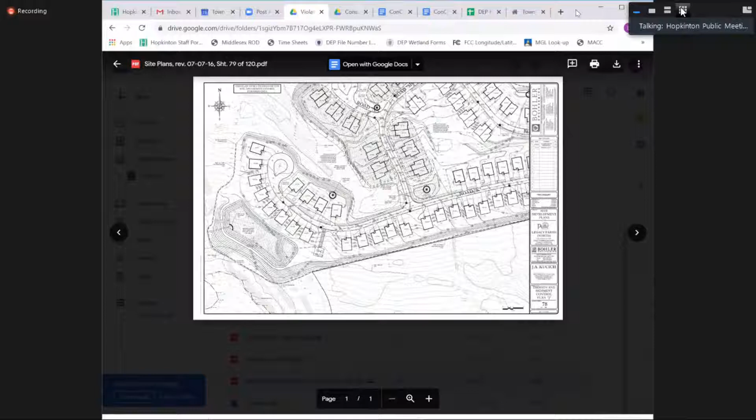So just cracking open - because after I saw this, I was out there on Sunday, I think it was Sunday morning or Monday morning. And it's just my observation that a lot of the erosion controls, the majority of them look like they're in pretty good shape. But there are areas where obviously they've been either damaged or knocked down by the construction activities, so they're not functioning properly. So I think Pulte needs to take a look at that, obviously.

This was the area of my pictures where I saw the breach, and then there was some areas along here - can you guys see the plan? Yep. And then there was some areas along here that the erosion control was in bad shape, but I didn't see any breaching in this area. But this was the area of the breach. This is the edge of the buffer zone right here, so the detention basin is outside. But they need to be obviously addressing the stabilization issue down in here.

So I didn't know if you guys wanted to have them come in at the next meeting. I know it's probably going to be pretty full, but we could put them on maybe at the end of the night and give you more sense of it, because they're working on it now with Beta, trying to make improvements out here so they're not going to run into this again. As far as I know, it was a one-time incident. Yeah.

Why don't we put them on the agenda for the June 9th meeting? And in the interim, if you can just follow up with them, Don, have Matt follow up with them and make sure things are moving along in a timely fashion. We don't want this to drag out for two weeks, obviously.

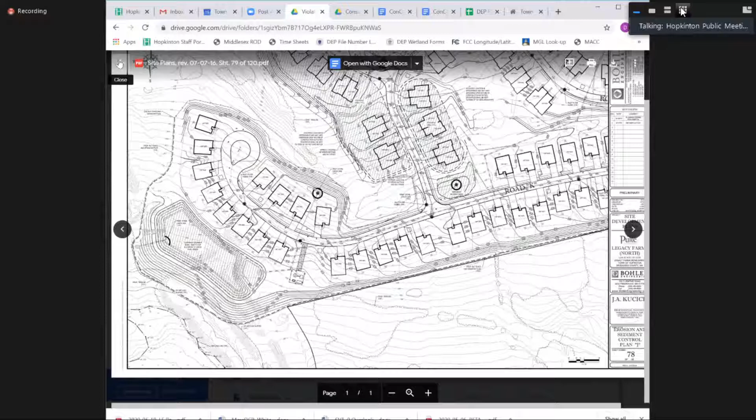Okay, so why don't we open it up to the Frankland Road Solar. This is a continuation of a notice of intent for the solar facility on 0 Frankland Road. I think I saw Mr. Rodriguez is in the audience.

Yep, I'm here. Good to see you again. Do you have someone else with you, or are you solo tonight? No, I have Nick Facendola from Level Design and Dan Wells from Goddard Consulting as well. Okay, all right, good to see you guys again. Good to see you. So why don't you just kind of give us an update as to where you are, briefly, it's been a little while since we've seen you. And then we can take it from there, okay?

Yeah, of course. Mr. Rodriguez, thank you. So Pedro Rodriguez from Seaboard Solar. Just to give a quick update on where we stand in the project - it's been a little while since last we met with the Conservation Commission. From the interconnection standpoint, since that last time we met, we received our impact study from Eversource. Everything came back positive the way we expected, and we expect to receive an interconnection service agreement within two months.

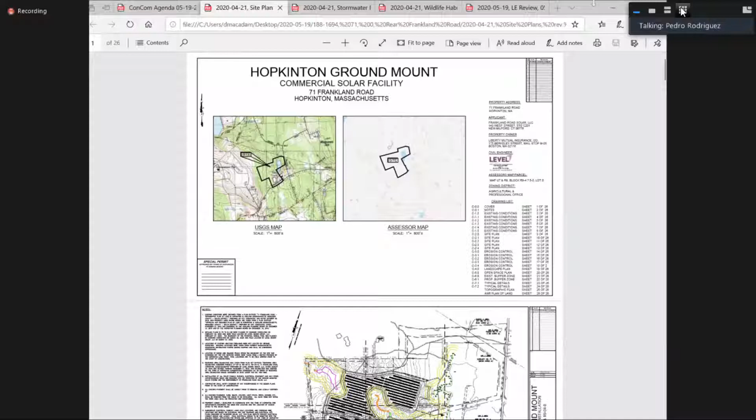Regarding the open space, as I mentioned before, it's our intention to donate the leftover land in the project parcel for preservation purposes and create an open space and inclusive trail. We proposed to the planning board last night to include that as a condition in our special permit, so we are required to donate the leftover land before the project achieves interconnection. Having the land donation as a condition of the special permit provides a guarantee to the town and neighbors that the open space will be in place, and it also gives an enforcement mechanism to the planning board. That's the quick update I have, and now I'm going to turn it to Nick, who's going to be speaking about the engineering changes.

Yeah, so just real quick, Mr. Rodriguez, how much land was set aside under the open space plan? 35 acres or? So we have about 45 acres in the parcel in Hopkinton, where the project is located, and then we have about 1.8 acres in the Ashland parcel. Okay, great, thank you. No problem.

All right, can you guys see this plan? No. Okay, it says I'm sharing, I paused mine, or I'll stop it. Yeah, there we go, there we go. Okay, yeah, so I'll try not to go over anything Pedro just went over.

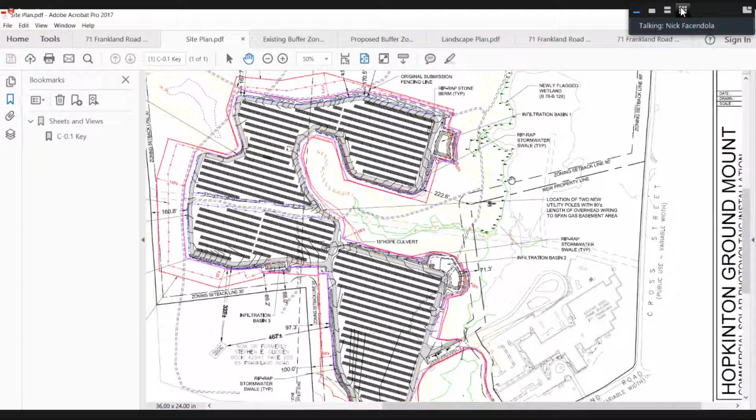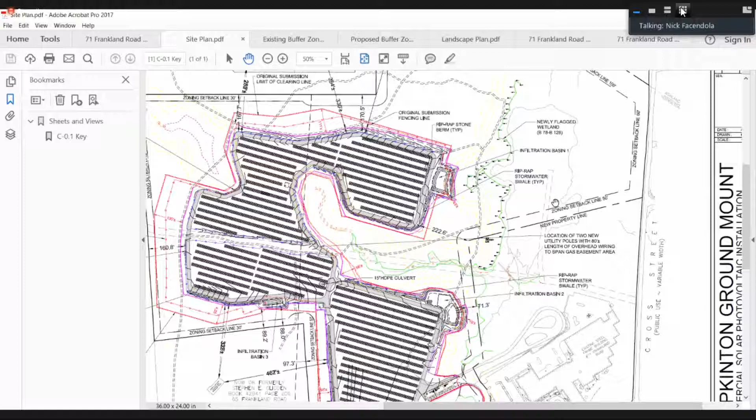Just a quick update on some wetlands items. We did delineate the BVW located around the existing pond as requested at our last Conservation Commission meeting. Dan Wells from Goddard Consulting did that delineation. We submitted that for review, and I don't believe there were any comments on it. We also have Dan with us tonight, who will speak after me regarding this new delineation and the wetland habitat study he prepared on our behalf.

In addition to the BVW that was delineated, we also identified a potential vernal pool in this area right here. I'll let Dan go into the specifics on the characteristics of the potential vernal pool and his findings regarding that area. But we are identifying this on the plan and have shown the associated buffer zone that goes along with that vernal pool.

On this plan, you can see this red line that goes around the edge of the property and down through here. This was our originally submitted limit of clearing, limit of work line. We've brought the limit of work for the solar array in significantly along this end of the property, this end up here, and along this property line against the vernal pool no-disturb zone. So the previously submitted site plan had a site disturbance of about 28 acres.

We're now down to about 23 acres, and system capacity, we've lost about 1 megawatt with these reductions. So we were at a 5 megawatt system, and we're currently at about a 4 megawatt system. These have been some voluntary reductions on Seaboard's behalf to preserve the existing trail network, which is shown on this plan in these dashed lines.

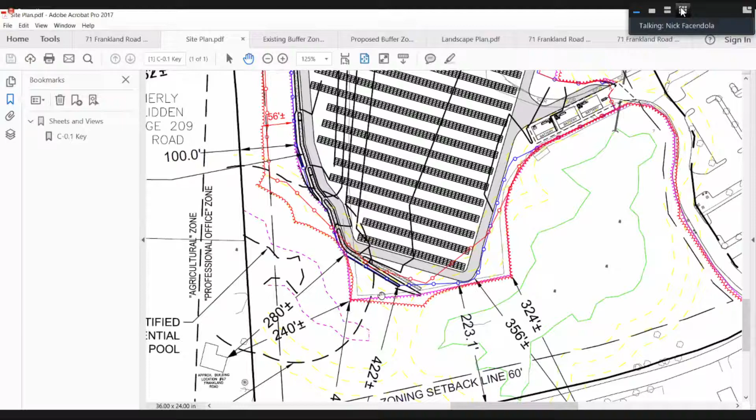So the impervious area all through here will be removed, and that will be planted with, in the area of the solar array, a wildflower pollinator seed mix, which is what we're proposing right now for the interior of the solar array. As we get closer to the buffer zones and area within the 125-foot no-disturb zone to the vernal pool, we will be doing some mitigation work in that area, removing pavement, and we are proposing some mitigation plantings.

Driveway width: after meetings with the Hopkinton Fire Department, we've reduced our driveway width to 16 feet. We were originally at 20 feet, so the driveway is 16 feet pretty much throughout the entire property. It's a little bit wider, remaining 20 feet in this area, as this is a tight sweep for an emergency vehicle to make, so we had to keep that at 20 feet, and same thing down here. We had to maintain a wider width, but the remainder of the gravel driveway has been reduced to 16 feet wide.

Equipment and utilities roughly remain the same. Our main battery storage area and transformers are still located in this area. We have a small equipment pad located here, and we also have a third pad located in this area, which was previously located elsewhere. That's been relocated to that area.

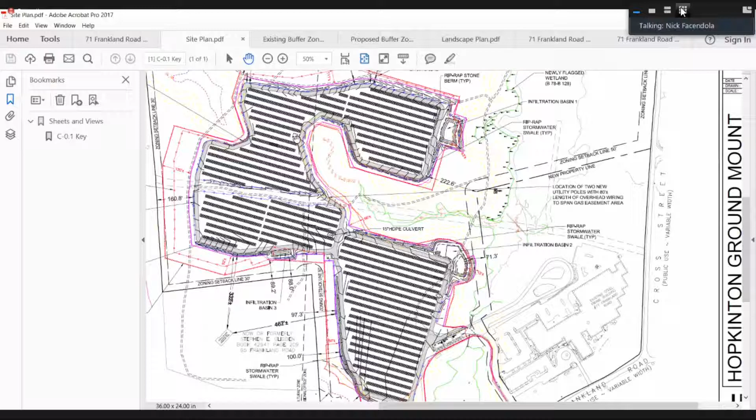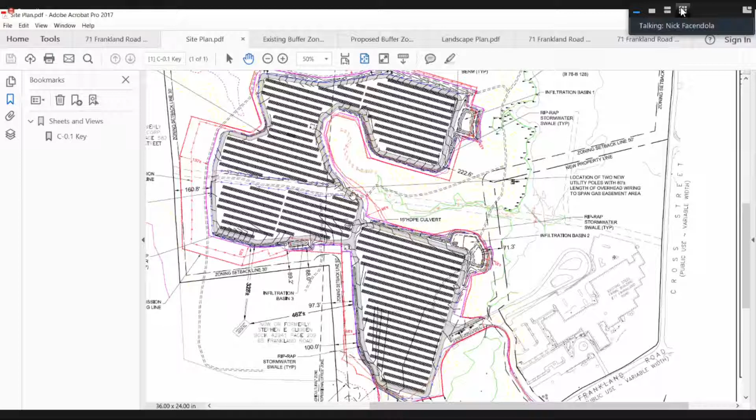As Pedro discussed earlier, we're coordinating with the utility company, the gas company, about crossing this area. We're going to have a crossing for our underground conduit right through here. It looks like we're going to be doing a surface berm versus utility poles to cross the gas easement. We're working out the fine details with Eversource, and we'll include a construction detail on our revised plans showing how we'll cross this area. Essentially, we're going to do whatever Eversource tells us to do to make that work.

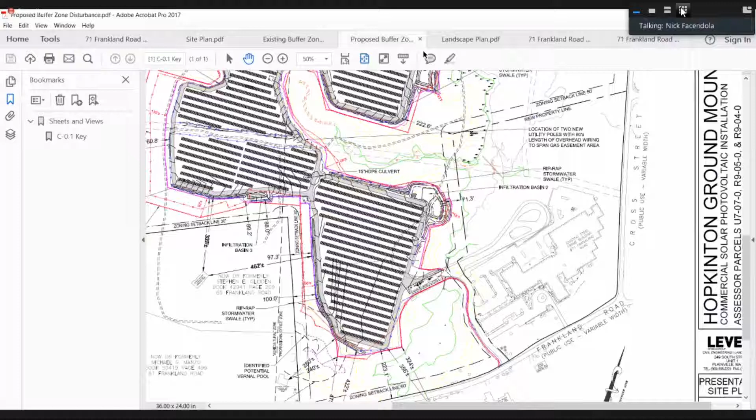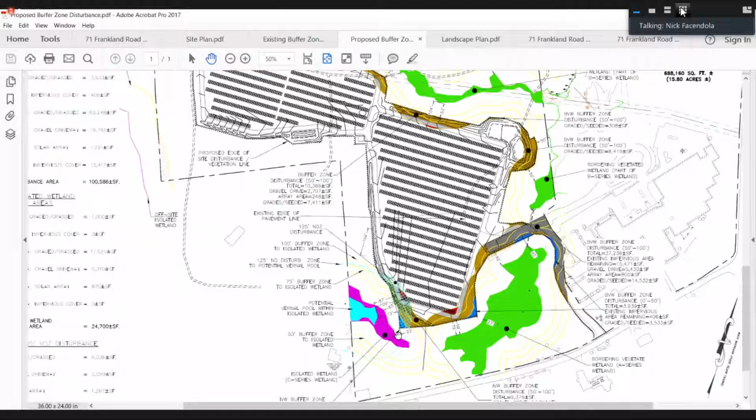Overall, that essentially highlights all the main changes. We've added a few additional plan sheets that highlight our buffer zone disturbance areas, showing existing buffer zone disturbances and the amount of work occurring. We're proposing some work within the 125-foot no-disturb zone to the potential vernal pool shown in this area. This blue hatched area is the 125-foot no disturb zone.

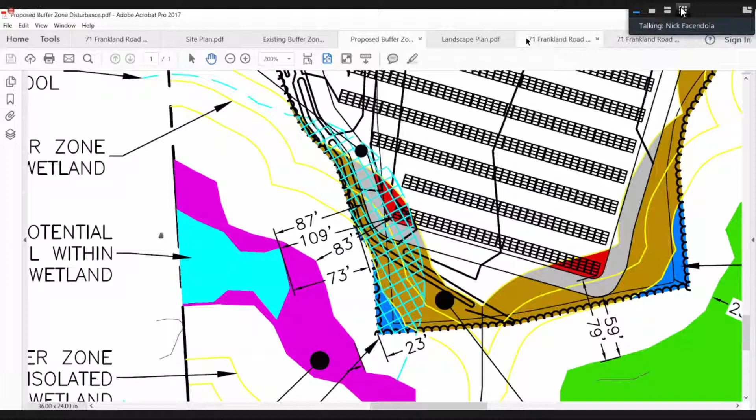We have a little section of our gravel driveway and some minor grading through this section of panels. I'd like the commission to keep in mind that this line here is all existing pavement, which we'll be removing. So this area within the 125-foot no disturb zone is currently paved. We'll be looking to remove a large portion of this pavement and do some mitigation plantings shown down through here.

So we proposed some plantings. Lucas Environmental did recommend some different types of plantings, which we have no problem complying with. We'll be making modifications to our proposed mitigation plantings in this area in accordance with the most current letter from Lucas Environmental. Other than that, all the panels are still outside of the 50-foot buffer zone.

There's mostly buffer zone disturbance associated with the project. Other than the restoration work, everything is outside of the 50-foot zone. In this area, we're going to be doing some restoration work and pavement removal of a pre-disturbed area that is within the 50-foot buffer zone. That's the only place we're dipping into those existing buffer zones, where there's pre-existing disturbance. Everything else is essentially grading and a little bit of driveway work within 50 to 100 feet of the buffer zone, with the rest being grading associated with that driveway.

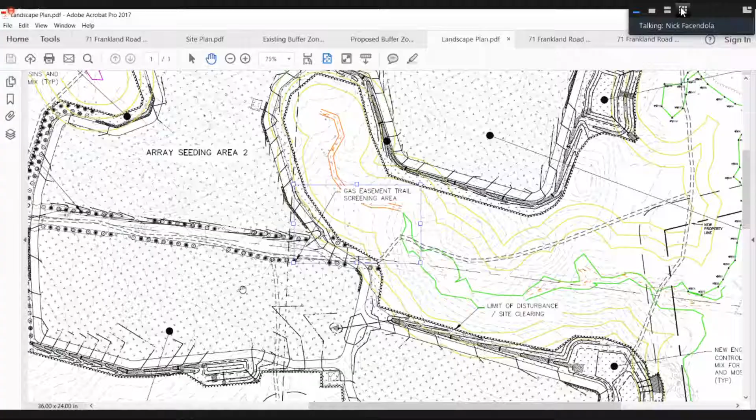Nick, what's the area of the asphalt that's being removed again, please? The area of the asphalt is, let's see, I think I have that in my letter. So a net reduction of 114,319 square feet of impervious coverage.

I assume Dan can walk us through the mitigation in a little more detail. Yes, so that essentially covers the proposed upgrades or plan modifications. We can get into the plantings. We're proposing mitigation plantings along this corridor here, mostly for screening purposes, and along this area through here, evergreen plantings for screening to the neighboring residential residences up in this area.

So that quickly sums up our plan modifications. Obviously, we'll take questions after, but I'll turn it over to Dan to discuss the trail. Okay, great, thank you. Right, you know what I mean? So they're just going to buffer it.

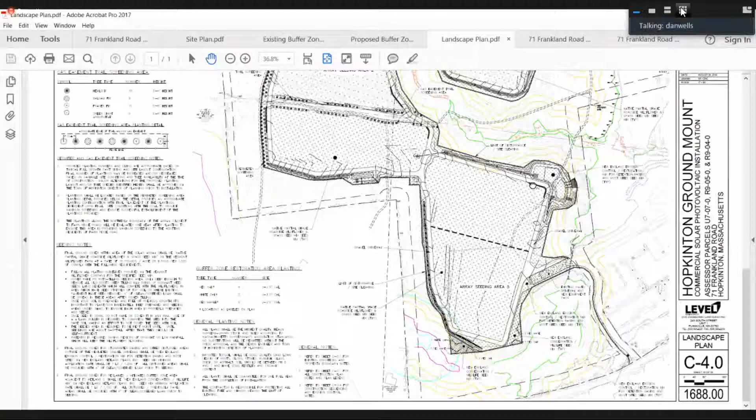Good evening, Mr. Chairman and Commissioners. As Nick indicated, I provided some additional BVW flagging on the northeast corner of the property. It was fairly straightforward. The upland forest came down the slope and met up with a small strip of BVW to the west of the large pond. Matt Verrill reviewed those, and I don't believe there are any changes from those flags.

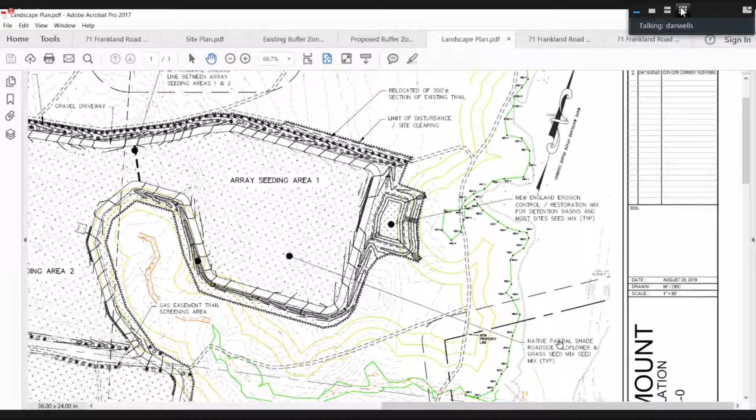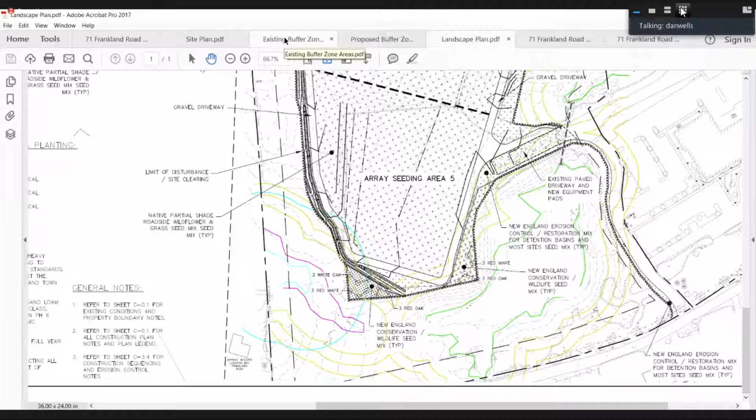The next part was, while I was conducting my habitat evaluation, I investigated the potential vernal pool to the southwest of the project, on March 20th of this year. While I was in that vicinity, there were calling wood frogs. A considerable portion of the vernal pool is actually off the property, so I stayed within the property limits, but there were wood frogs calling from inside the property as well.

So I flagged the maximum observed, flooded vernal pool as I saw it on that day, which is pretty much right in the peak season of vernal pool activity, so it's fairly well defined. Those flags on the plans reflect the flags I put in the field. I can certainly confirm that wood frogs were breeding in that pond. It's likely there could have been spotted salamanders, but I didn't do an intensive investigation because most of the deepest parts of the pool were off property.

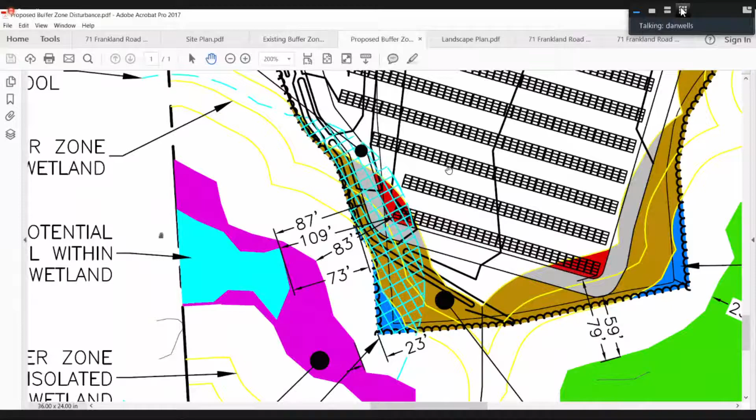In addition to that, I conducted a detailed wildlife habitat evaluation. I took the project's limit of work and overlaid that on the edge of buffer zone, and calculated 5 separate impact areas throughout the project site. Starting in the northeast corner, there's an area that's rather small in extent. The next one, impact area 2, is the part of the buffer zone that surrounds the stream system that traverses through the center of the property. Further west, there's some buffer zone associated with an isolated wetland in the northwest corner of the project.

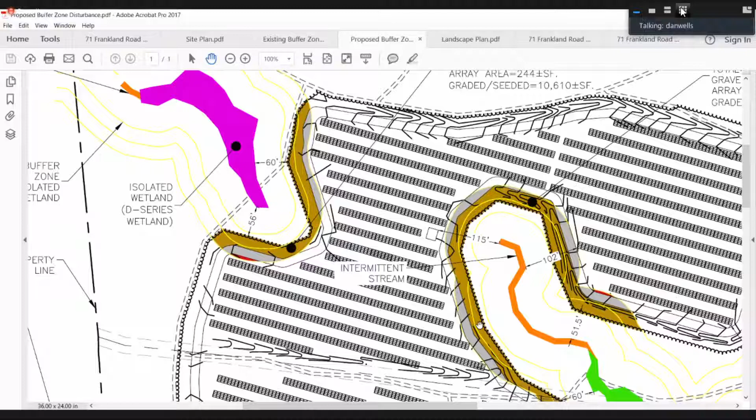For all of those impact areas, it was fairly uniform, mature forest mixed, dominated by oaks, red maple, and some white pines mixed in. There were no real unique habitat features. In all of those cases, there are large woody debris objects on the ground, some berry-producing shrubs, and food sources from the acorns from the oaks. But there was nothing unique or out of the ordinary from the rest of the surrounding landscape in those areas.

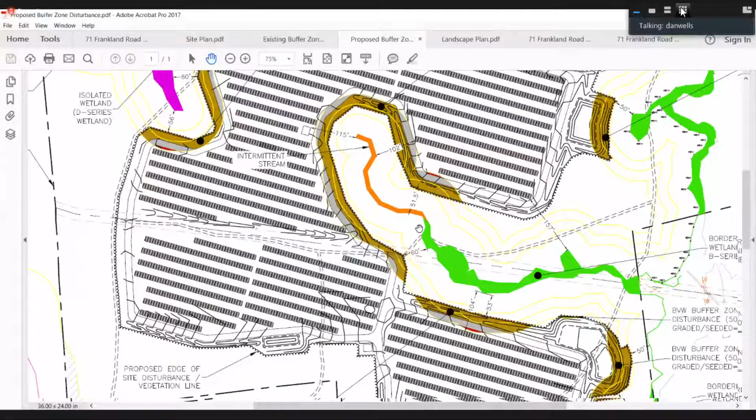The next impact area was the one partially adjacent to that vernal pool. With this impact area, almost the entire impact area is within existing pavement, so it's pretty low in terms of wildlife habitat impacts. Some of it extends a little bit beyond the pavement, and as my report indicates, the edges of that parking lot are lined with a mixture of mostly invasive species. So even up to 10, 20 feet beyond the pavement edge, the habitat being altered is not of high quality to wildlife.

That extends back up to the north towards impact area 5, which is a small one in the eastern part of the property. That area was somewhat unique in that it had some very large boulders. It also had quite a bit of invasive species. Overall, the unique part of that impact area was the large boulders, which could provide burrows and sheltering habitat. I'm referring to impact area 5.

Overall, in a large project like this, when there's wetlands, particularly a large pond, we know there's turtles, so the first question would be: do turtles leave that pond and come up and nest in the work area? Because it's almost entirely forested and/or disturbed by pavement, I don't believe there's any turtle nesting habitat. So that's one potential impact that wouldn't occur at this project site.

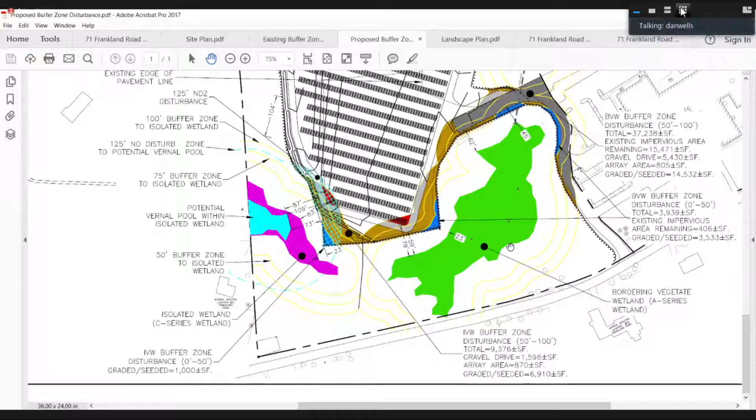And so that's essentially the gist of the report, is that there's certainly going to be impacts when you're building a project this size, but it's to common wildlife species. The habitat features present in these impact areas are not out of the ordinary or uncommon. There's going to be standing dead trees and woody debris surrounding the project site in the open space.

Can you give us just an overview of the mitigation proposed in the area where the vernal pool is?

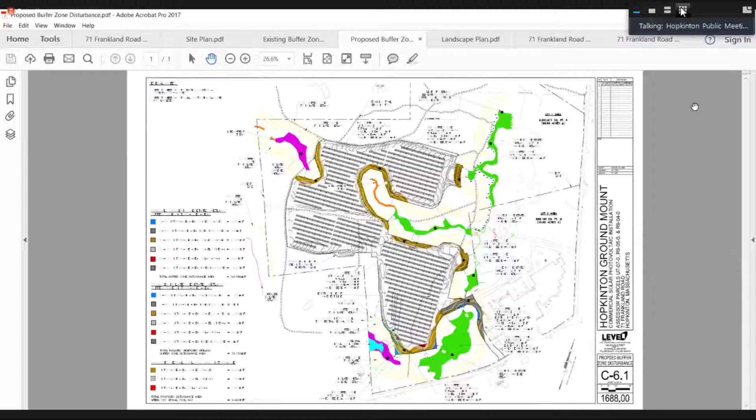That's more Nick's design, but what I recommended to Nick was that because there's a vernal pool, the vernal pool amphibians depend on forested habitat adjacent to the vernal pool. So that's why I recommended that we put tree species in there, rather than just putting shrubs. Ultimately when those tree species, those oaks and maples, mature, they're going to provide leaf litter, and they'll actually provide some actual habitat for the wood frogs and spotted salamanders.

Okay, and obviously the pavement is all going to be removed from that area. And then I think one of Lucas's most recent comments was just the density of the plantings. I think we're looking for the density to be a little bit greater than what's proposed. So I think I heard, I can't remember if it was either Nick or Pedro, that said they were amenable to that, but I just wanted to confirm that.

Yes, as Pedro said earlier, the landscape plan is still a work in progress. We're meeting with neighbors and taking input from your board, the planning board, and the surrounding neighbors. So we'll definitely incorporate those changes.

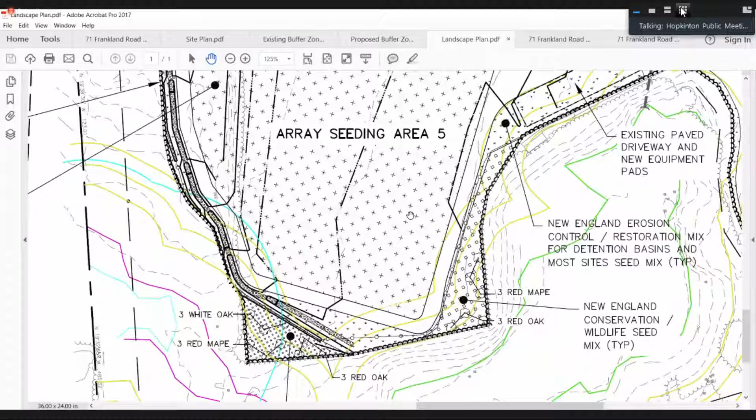Yeah, thank you. So I guess one thing that I had included in my most recent memo was raising the question of, would it be possible to pull all the work out of the 125-foot buffer zone? Especially just looking at the plan, if there's room to shift it to the east, where you've got some room where you are proposing some restoration there. If everything got shifted to the east, out of the 125-foot buffer zone, then do perhaps more meaningful restoration throughout the whole 125-foot buffer zone.

Or, I'll leave that to you, Jeff. I don't want to speak for the commission if that's something that the commission would be interested in. Yeah, I think so, Matt. I guess the way I'm looking at it, I think that does make sense.

If Seaboard is amenable to doing that, I guess that was one of the first things that kind of jumped out at me when I was looking at this portion of the project, was that the arrays were located within the buffer zone in that area. But then after I looked at what was being proposed in terms of mitigation, I'm happy to hear that Seaboard is removing all the impervious asphalt out of that area. That's great, and thank you for doing that. That's a huge benefit from a stormwater perspective and an environmental buffer zone perspective.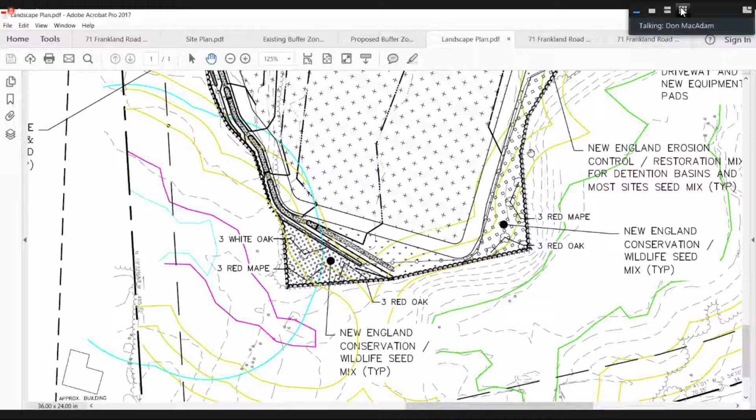So comment number 7, Matt, on the tree— Actually, Jeff, care before you jump down to 7, comment number 2 was about the alternatives analysis. Right. Yeah. Okay. Sorry. Yeah.

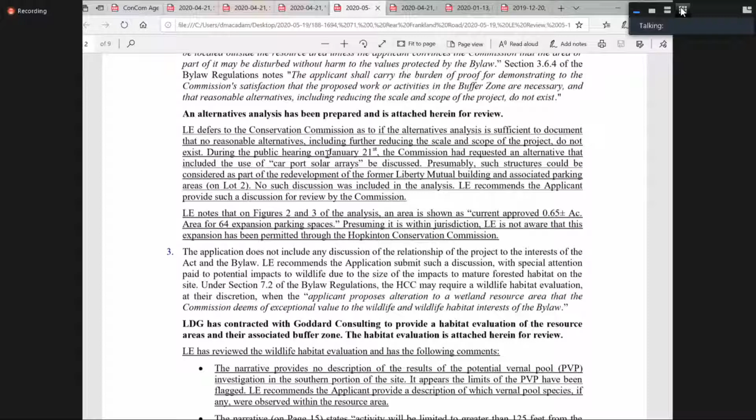One of the issues that had come up at the first hearing, or one of the questions, was if the applicant had considered any sort of carport, quote unquote, solar array. And I think that was an expectation that there was going to be some discussion in the alternatives analysis as to whether that was feasible, again, to use more of the existing paved areas potentially that could still be used as parking lots, but to minimize the disturbance of the forest, whether that's in buffer zone or anywhere throughout the site.

I don't know if the applicant can speak to that. Sure, sure. So with regards to carports over the existing lot for the existing building, technically that lot isn't part of this application, and we didn't feel it'd be appropriate to include that as a viable alternative because that land is not located within the confines of our development parcel. It is owned by Seaboard Solar and was purchased, but it is not part of our solar array parcel, and therefore it would be hard to classify that as a viable alternative when it's not part of the area or parcel which the application is currently under.

So Nick, I think we just need to spell that out in the alternatives analysis. Sure, we can modify that. Okay, if that's the position that you guys are taking.

So, comment 7, Matt, on the tree line. Applicant clarification regarding plantings - are they proposing these areas to expand the existing tree line? I guess the applicants can speak to that. Yeah, Nick, do you know the area I'm talking about? No, I can't, I'm not visualizing it. I'm sorry, Don, can you bring the plan back up?

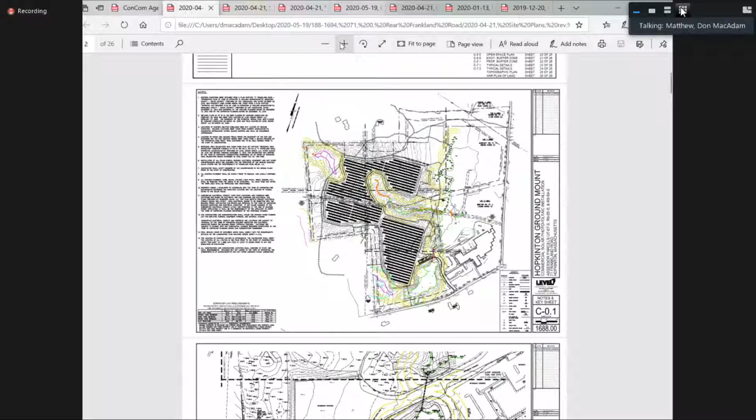Which plan do you need? Probably that first one would be good. Can you zoom in sort of in the south, to the west of the existing building? I don't know if it'll show up on this. Lost my ability to move it. So it was, I think, sort of in the area west of the building, Nick, where it showed the proposed tree line was maybe 10 or 20 feet east of the existing tree line. I don't know if that was just a typo or something else.

So we're looking at the westerly property line where that dimension is. I'm still not seeing it. Hang on a second.

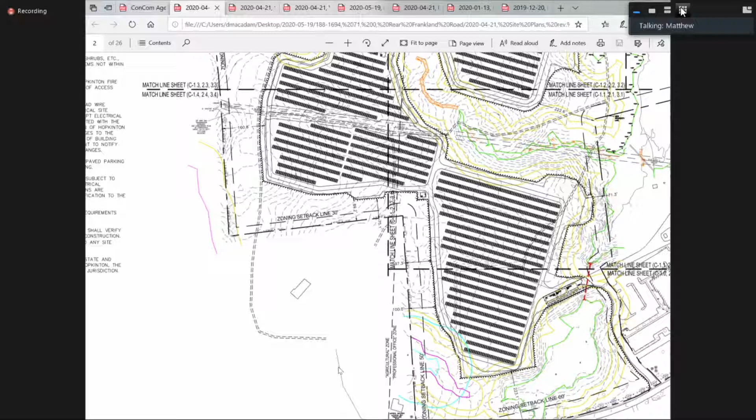Well, in the interest of time, I can follow up with you afterwards, Nick, if you want. Sure, yeah, if you could send me a PDF to circle it, it's probably just a minor drafting item we can take care of. Yeah, it's probably the case.

Okay, so moving along, comment 13, the proposed sequence for the construction. I guess my comment there, Nick and Pedro, is I understand where you're coming from. My concern is we've had a couple larger scale projects going on in town where the site was essentially cleared and denuded prior to the contractors coming in. And we've run into issues, particularly in the fall and spring timeframes where we get these heavier rainfalls, and you get the erosion issues coming off the site.

So that's where my thinking is. I just don't want to be in a situation where you guys come in, clear all of the land, and then we have some heavy precipitation events where we have erosion and other issues at the property, which again is something we've experienced on a few other projects in town. As a matter of fact, we were just discussing one at the beginning of this meeting. So if you can speak to that, maybe provide us a little bit more detail, not tonight, but in narrative form, as to how, when you're working on this project, that type of thing is going to be prevented and won't happen at the site. So you can briefly speak to it now and give us some feedback.

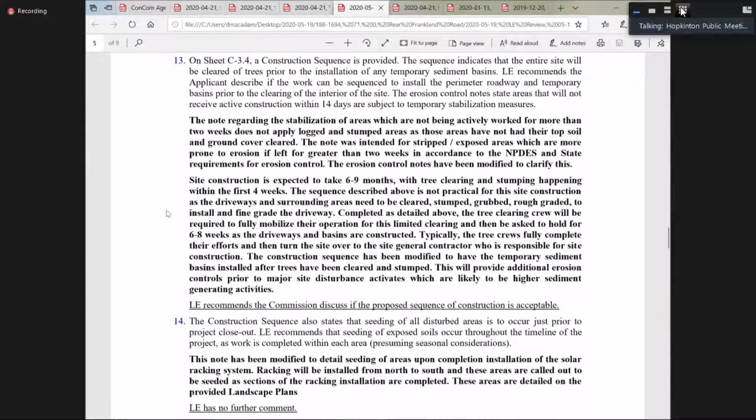So comment 16 from Lucas, the detail revised to show the presence of the construction fencing. I think that's pretty straightforward.

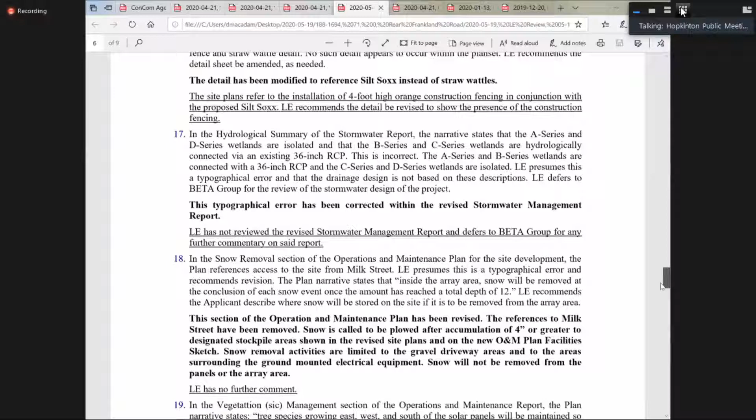Comment 19, the regulatory mechanism for future maintenance of perimeter vegetation on the project site. So I think in that situation, we would just put a condition in the order of conditions that any maintenance that's performed, you just present that to the Conservation Commission prior to the work being done so that we can review it and give our input. All right, we understand, okay.

PIBs, so we have a standard condition for the installation of the PIBs at the project site. I think that's straightforward.

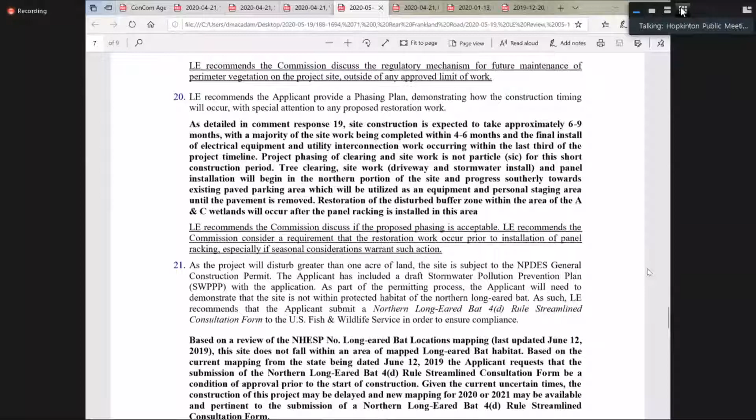Comment 24, Lucas recommends a nurse seed to be installed in conjunction with the proposed seed mixes for cover and soil stabilization. I think that's fairly straightforward. So that, I think, is the gist of Lucas's comments.

And then I went through Beta's comments as well. I think you guys are good to go there. There are a couple that I just wanted to run by you. I don't know if they've been addressed as of yet, but let's just scroll through them now.

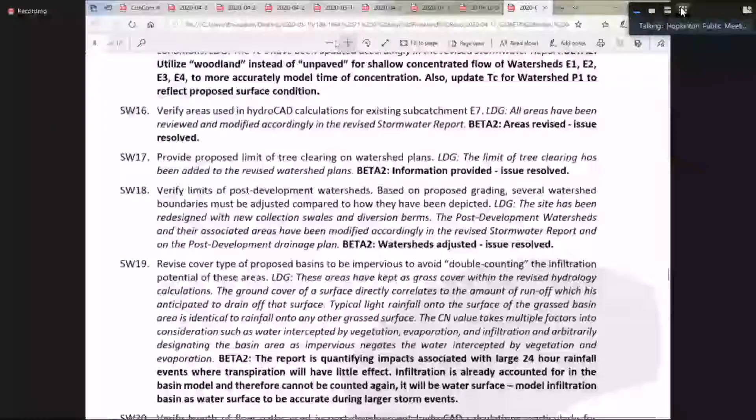So stormwater comment 15. Beta's comment was to utilize woodland instead of unpaved for shallow concentrated flow of watersheds E1, E2, E3, E4 to more accurately model time of concentration. Also update the TC for watershed P1 to reflect proposed surface conditions. So has that been addressed, Nick?

We haven't formally responded to those. We will be responding to those comments, they're all essentially minor. Yeah, I think one section they're referring to is I modeled the gravel surface independently, so I made sure to break out if stormwater was crossing the gravel driveway. I called it an unpaved surface. I just think that, all right, so there's 4 or 5 of the comments there that I think you guys just need to tie out with Beta. We'll look to them to get back to us to make sure that has been taken care of.

Okay, so at this point, why don't I just open it up to comments, questions from the other commission members? Through the chair?

Just want to bring one thing to light. This was the bylaw supplement sheet for the original NOI, and this is the revised one. Now I would think they'd need a variance request for not meeting the limits of work. I know they make notes about what's previously disturbed, but I'm having a hard time understanding what is previously disturbed and what's not. I thought the commission might ask, is the entire 9,402 square feet of the vernal pool previously disturbed? So I'd think they might want to give the commission a variance request and flesh out these numbers for the commission's understanding. Okay, that makes sense.

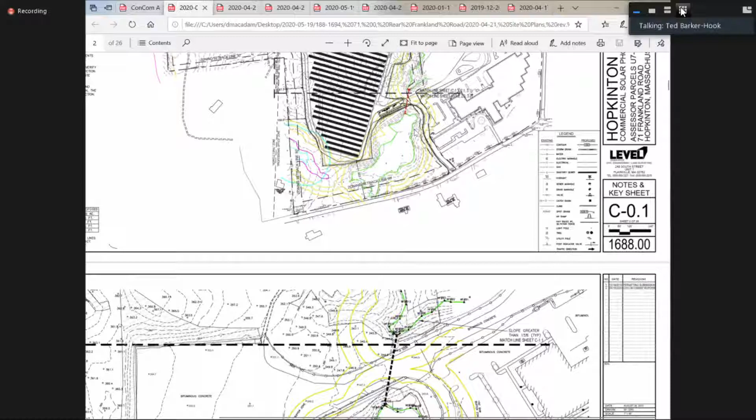I'm of two minds in that southwest corner with the vernal pool. I agree with you, Jeff, that removing all of that pavement is a wonderful situation and not the kind of thing we've seen in other solar farms. At the same time, our commission over the past years has been very, very firm about solar panels within buffer zones, and I fear bending that rule, what that could lead to in the future. So I haven't made up my mind about that corner, but I do have hesitations despite the pavement removal, which I very much appreciate.

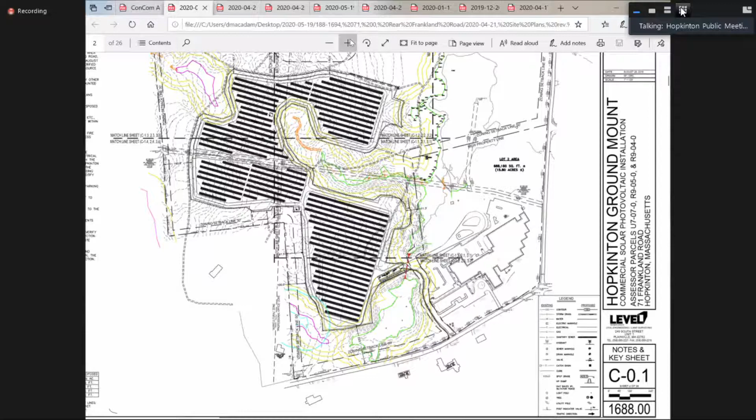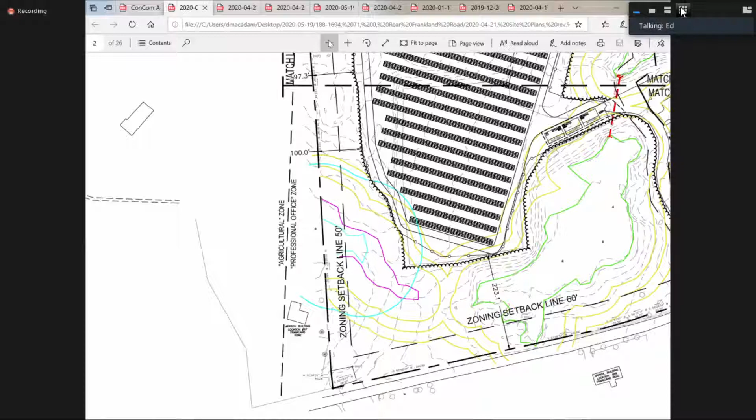Comments, questions from commission? Anyone else? Yeah, there we go. This is Ed Harrow. I want to echo what Ted said. There's close to 2.5 acres of buffer zone, as I read those numbers, that are being disturbed or being worked within, and as others know, I don't like that.

The other thing that concerns me, do we have any history of the quantity of land being denuded and left open in any other project in town that measures up to this? I'm very troubled with that whole concept, and I'm looking to see that this is not novel.

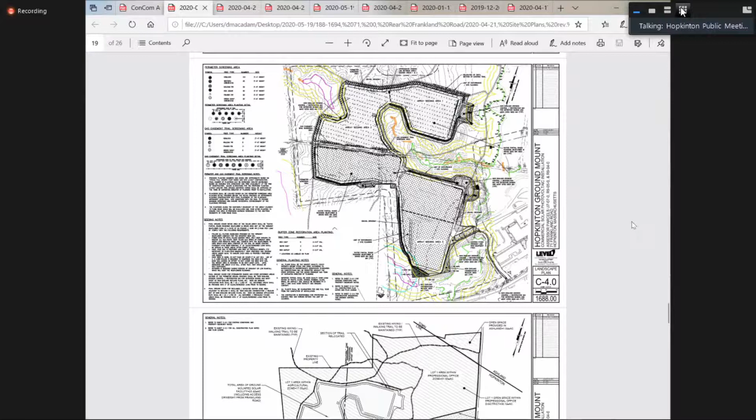In terms of solar projects? No, in terms of anything. Yeah, I'm sure we do. It's going to take a little bit of research to go through it, but we can work with Don outside the scope of this meeting to identify that.

Sites that you can take a look at. My last comment is we oftentimes hear promises from people that they're going to do this and they're going to do that, and they don't follow through so well. And I'll close off at that. Thank you. All right, anyone else from the commission?

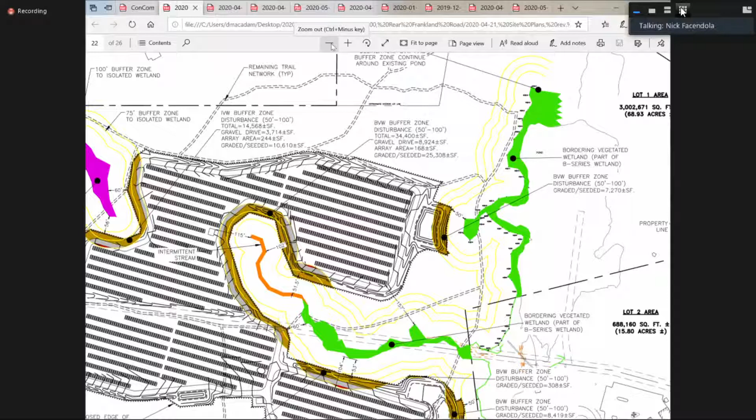Janine, could it be confirmed that there is no tree clearing within the buffer zone? For the whole project? It was my understanding there was no tree removal within the buffer zone, that it was all outside. No, there's definitely clearing within the buffer zone. All that disturbance is within the 50 to 100 foot zone. We have no new panels in newly disturbed areas within the buffer zone, is what my intended statement was.

Hope you understand that. So as we stated before, down at where the paved area is, we have a few proposed panels in that area, as it was previously or is currently paved. But any virgin buffer zone areas, we don't have any panels or fencing located in those areas.

Okay, but there are some areas within 50 to 100 feet of the buffer zone that will have the gravel driveway located in them, and then we also have some clearing activities within 50 to 100 feet. A lot of this is well detailed on sheet C 6.1. If you have time to go through that, it outlines what's going to be gravel driveway disturbance, if there's any, what I call system array disturbance—not even panels, just anything inside the driveway that's in the array area. And then I also break out what's going to be grading and clearing work within the buffer zone.

Mr. Robertson? Hello? Did you have a comment, sir? Yes, Tom Robertson. I'm from 16 Fawnridge Road.

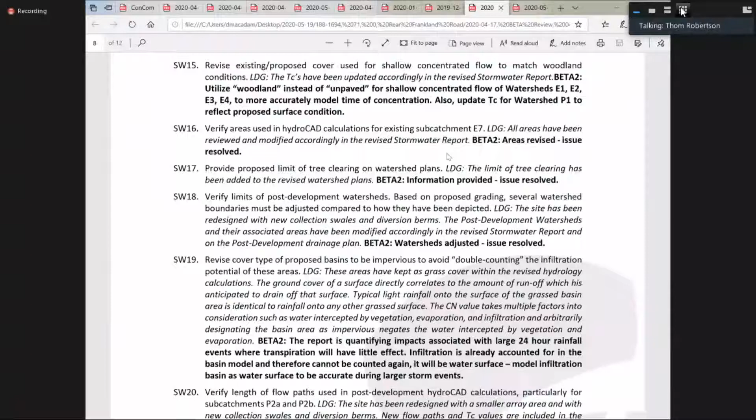I had a number of questions that I needed independent help from Beta with. Are they on the line? Beta is not on the line, no. Well, it's hard for me to provide some of my comments without them being able to act as an independent resource. If you would like to send the commission the questions you have for Beta, we can forward those and get the answers for you.

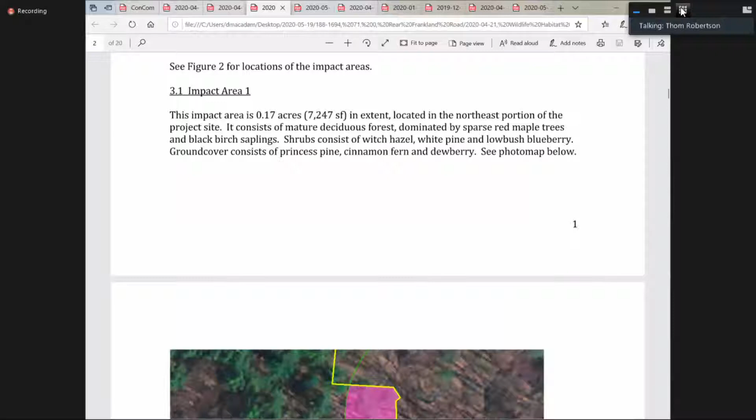All right, let me move on to my non-Beta related questions, just some general comments. One of the board members mentioned something about this being a novel situation, and I think this property is particularly novel in a deforestation and development sense, in that it's basically surrounded by these various wetland areas. As far as studying and understanding what that means for protecting the environment and the intent of the Wetlands Protection Act, I'd like some inquiry made as to the impact in these cases. The birds, wildlife, animals, frogs, toads, owls and bats that are in those wooded areas planned to be decimated deserve to be accounted for, and the impact on their environment understood.

The second thing is, in terms of the wildlife study that was done, I heard in several cases an appropriate qualification that this is not going to be an issue, or that they'll be able to migrate to other areas. I don't know that the Conservation Commission wants to base their approval and compliance with the Massachusetts Wetlands Protection Act, which does specifically mandate that wildlife habitats should be protected, on an assessment coming from a non-independent source.

The third thing I wanted to underscore was the comment one of the board members made about denuding land and what that means for erosion. In several different areas of this permitting process I have heard assurances made, and the boards are making decisions based upon these assurances.

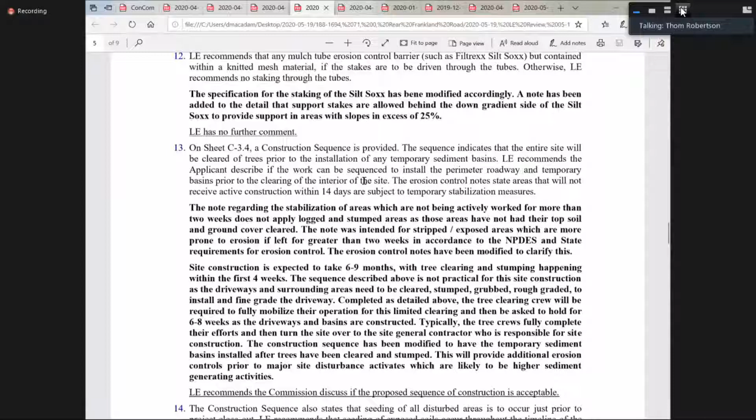So I think a study needs to be made, or someone needs to review other sites, as one of the participants suggested, to see what the methodology has been in the past for these types of solar arrays, particularly in an area with as many challenges as this one has with the boulders, the grading, and the religious and historic sites that are attempting to be preserved.

If I was a tree removal company hired to do a job in 4 weeks, believe me, it's not going to be wheelbarrows and pickaxes and handsaws. It's going to be bulldozers and cranes, and I'm going to grade where I need to grade to make it happen as quickly as possible. I think it's naive of us to believe the developer is going to be particular without destroying and leaving the ground barren and subject to many of the concerns that have been noted about erosion.

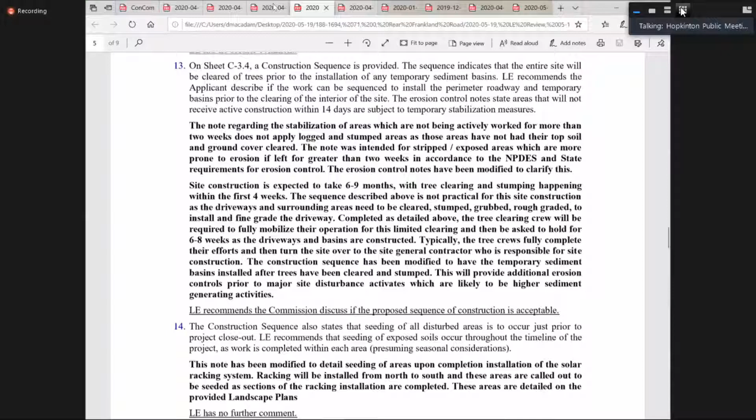Okay, so as we stated during the hearing, we'll take a look at a couple of other projects with Mr. Harrow and the staff, and best practices, to your third point. To your second point on the habitat evaluation, you're correct that the applicant's consultant did provide the habitat evaluation, but for clarification, the commission has our own consultant, Lucas Environmental, who works on behalf of the commission and the town and has provided the peer review of that as well. So it's not an independent report prepared without review on behalf of the commission.

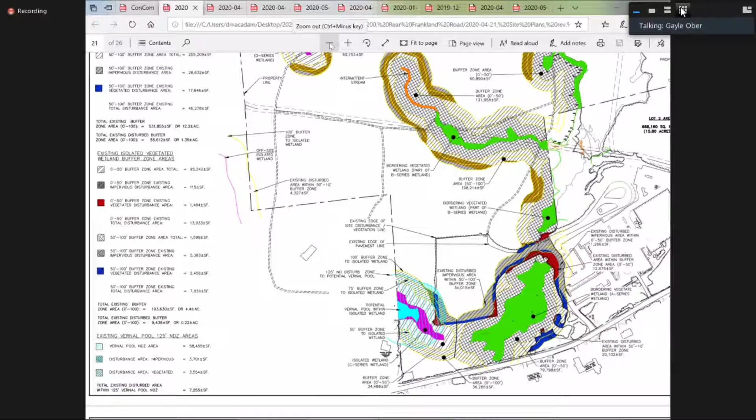We are 100% against this project and the clear cutting of the land, obviously. I wonder where there was so much clear cutting for Legacy North, and all of the animals have been displaced. Now we have the next corner. Where do all of the animals go?

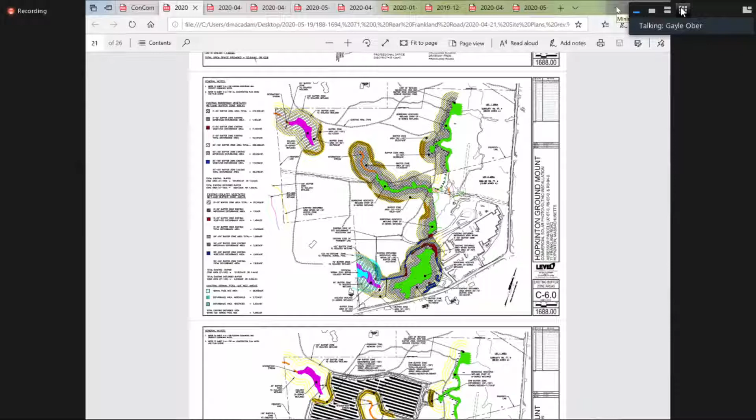One corner is Legacy North and the next corner is this with 30 acres of clear cutting. But my biggest question, after vetting Seaboard Solar on our own and hearing and finding out how they do not complete projects, and that there are projects such as what Ann Karnofsky had said in Oxford that are unfinished and things were not done as they were promised — who is going to hold Seaboard Solar accountable with all of this devastation, and how are they held accountable by the Conservation Commission? How are they held accountable, and how will we know that they're going to do everything that they say they're going to do?

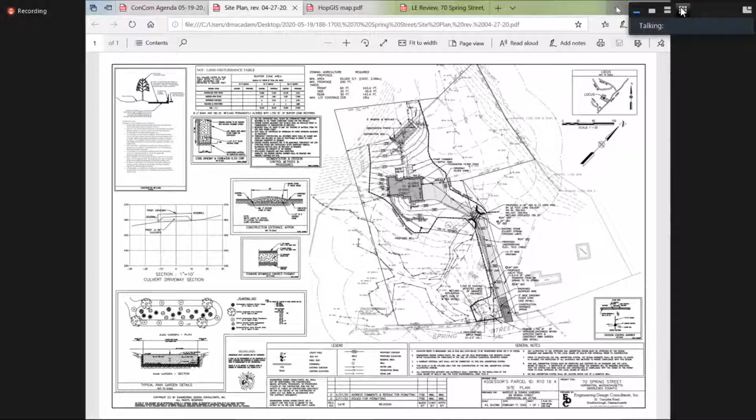Do we have someone that is going to be joining us on this one, Don? Do you know if emails went out letting them know? Do we have the applicant for 70 Spring Street with us? Speak now or forever hold your peace. Do we have the applicant for 70 Spring Street? Okay, I guess we'll move on, Don. Okay, continue this out.

Okay, so the next hearing is Hayes, 16 Downey Street. This is a continuation for a notice of intent for a single-family home. Hi, good evening. Hey, Mr. Marquedant, good evening. We met with the board some time ago, back on March 10th.

Yes, and this site consists of an existing -- I guess maybe we should back up just a little bit and recap. We have had the flags determined, wetland delineation done by Northeast Ecological, which Matt has reviewed and agreed to. We have an existing dwelling down by the water, which we're going to convert into a shed. The existing deck portion is going to remain. There is no construction taking place, no excavation. We're utilizing existing foundation walls and recreating a shed around those walls. We're proposing that house, which is that heavy black line right in the middle of the plan.

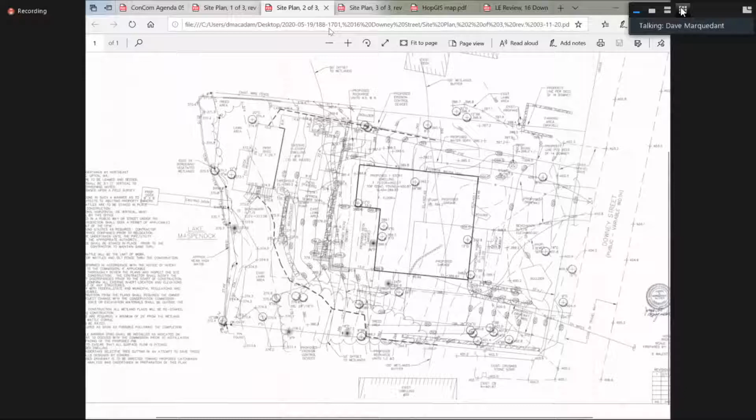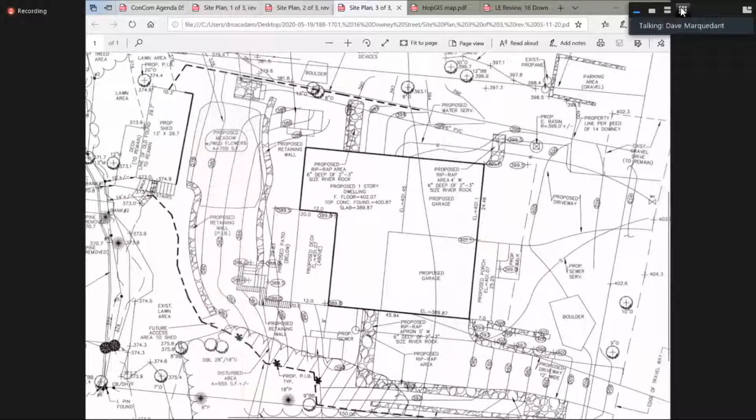We're proposing a series of retaining walls, most of them about 4 feet high. Don, if you could go to page 3 -- got it, it's a little bit clearer. There we go, this is the proposed condition plan. No existing contours are shown. On the left-hand side of the screen you can see the shed, the water's to the extreme left, the lake, and the retaining walls are shown as a hatched area.

You see one retaining wall about 30 feet off the water, one about 50 feet off the water, and then three up by the driveway on the left side for the garage under. We have a series of riprap aprons along that same driveway on the left-hand side, 3 foot wide and 5 foot wide at the end of the driveway. We have two riprap aprons on the right-hand side at the right front corner of the proposed garage, and then down along the side of the house on the right-hand side, those are 4 foot wide and 5 foot wide, with river rock, a trap rock.

On the bottom of the page, the hatched area is an existing tree line. We're disturbing that area, which is 555 square feet, and we're proposing a wildflower meadow between the house and the proposed shed.

Lost it. Here we go.

We have also added a catch basin at the driveway on the right-hand side, listening to one of the abutters last time, house number 14, which is to our right. There's runoff coming from Downey Street, some on his property, some on this property. So we're adding a catch basin to receive that water and then piping that down to a riprap apron, just to the east, north being straight up the page, just to the west of one of the corners of the shed. That discharge point would be about 52 feet from the wetland.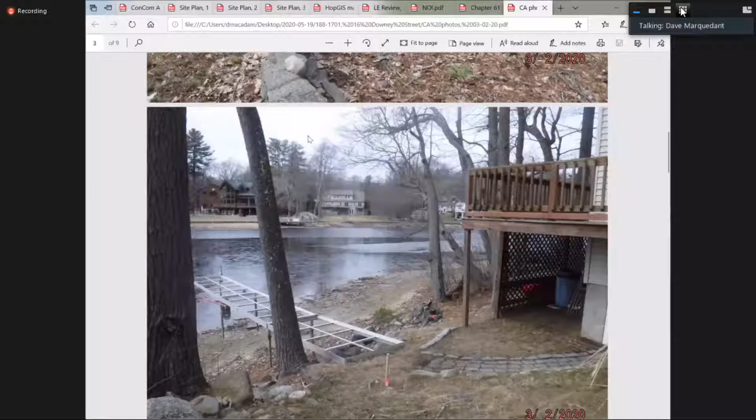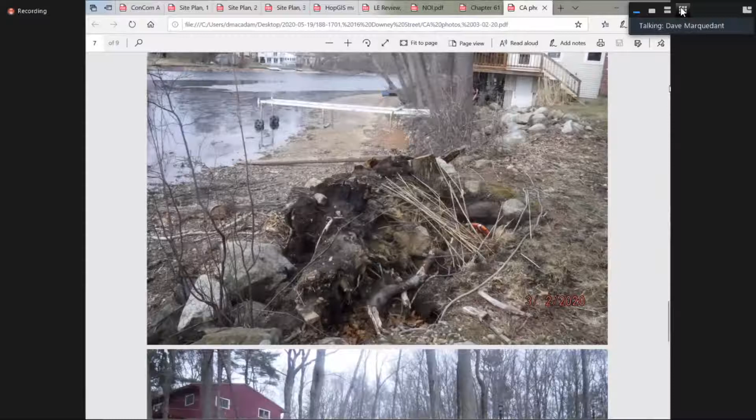It would be - here we go. There we go, those are the 2 stumps, and then just in the background, there should be 2 pine trees that were agreed to be removed with a letter from, I think, from Don some time ago.

So, Don, in that previous discussion, was there some approval of how that bank was to be restored? Yeah, for the removal of this, they would have to have no exposed soils and have this completely stabilized.

Okay, I just don't know if that needs to be part of this order, or if that's a separate issue that's - right, because obviously that letter went to the previous owner, so now we have a new owner. Is that how it's going, Dave? Yes, yep, Renz is with us, I think.

Renz, are you there? So Dave, I mean, it sounds like he's not here. Can we just include a condition that that area be stabilized? Yes, as part of this application, I think. Yeah, just tying it into this would be easy, rather than addressing it as a separate issue.

Does the board have a set timetable as to when they'd like to address that? Should that be at low water? Certainly, that would make sense.

Don, Matt, you have any comment there? I'm sorry, I had it muted. This is Renz Hayes. Oh, okay, Mr. Hayes, how are you? I'm doing well. How's everyone? Good, thank you.

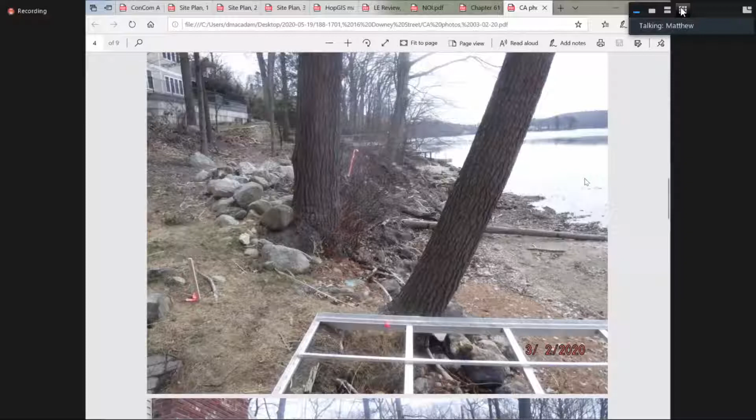Because the water is up to that level now, it wouldn't be viable to do it right now. I think if it's just a condition of the approval, it can be done anytime before requesting a certificate of compliance. I would recommend, though, that the applicant provide some description of exactly how that's going to be stabilized, since it's truly the bank of the lake and needs specificity as to how it'll be done so it's stable long term.

I think that's something Mr. Marquedant can provide for you. Yes, we can do that.

When the previous owners had it, I worked with them through the exemption request and through the Concom. The two trees they wanted removed, the stumps were going to stay in place to naturally rot, so we wouldn't have grubbing out and erosion issues. Then this one had a tree attached to it, and they were supposed to remove the tree, and since the stump was exposed, they were supposed to remove it or get it to the point where it was completely stabilized with no exposed soils. Those were in letter form through the exemption request, so those letters go with the property.

Are you suggesting we continue to handle it under the exemption request letters as opposed to under the order? We could do it either way, it was just still supposed to be addressed.

I don't know what the level of the lake is now, but if it's not too high, they would have to stabilize this until they can have the appropriate time to remove it. If it's not going to happen until the fall, my sense is they could put some silt fence up around that so it doesn't erode into the lake, or get a bunch of mulch to keep it stabilized as well. So you could put erosion controls in front and cover all the exposed soils now so it doesn't wash out. I think that's a fairly straightforward temporary fix until you can permanently address it in the fall, Mr. Hayes.

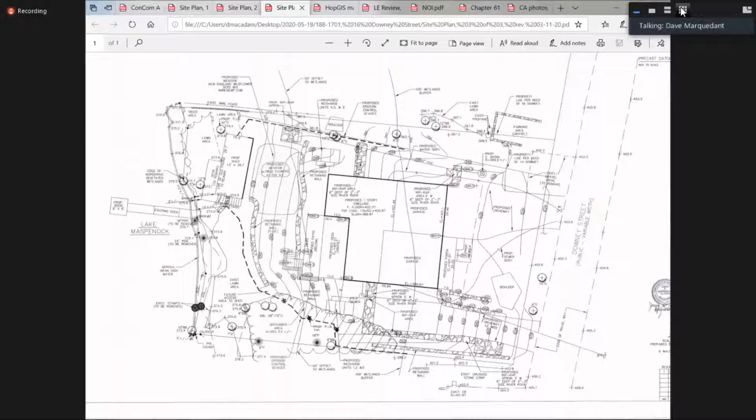Don, sheet one, maybe two. Sheet two, if you could, Don. There you go. There's Chris's home there. So his driveway is up by the street. He has a series of walkways, and then down towards the lake is some lawns and a retaining wall. So our intention is to capture our own water and direct it towards the riprap apron.

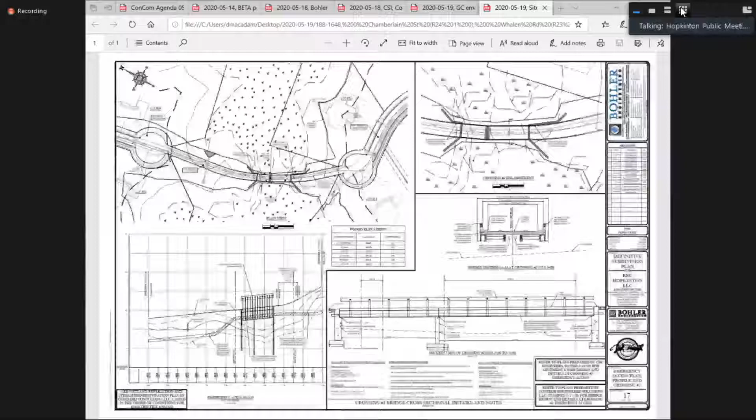Right, so I think we agree with you. We just touched base with Beta to find out where they are with their review, Mr. Cusack, and they are not quite done with it. They're about 95% there. They basically just let us know that it didn't look like there were any showstoppers at this point. They just had a couple T's to cross and I's to dot.

So unfortunately they weren't able to get this complete for tonight's meeting, but I think we're just about there. In terms of Lucas's review, Matt, I'll open it up to you to make sure your issues have been resolved. See if you got any ongoing questions or comments. Yeah, I think from my perspective everything's been addressed, and the wetland and stream restoration plan is adequate to go forward for construction.

Okay, perfect. Any questions or comments from the commission members? Any questions or comments from the audience?

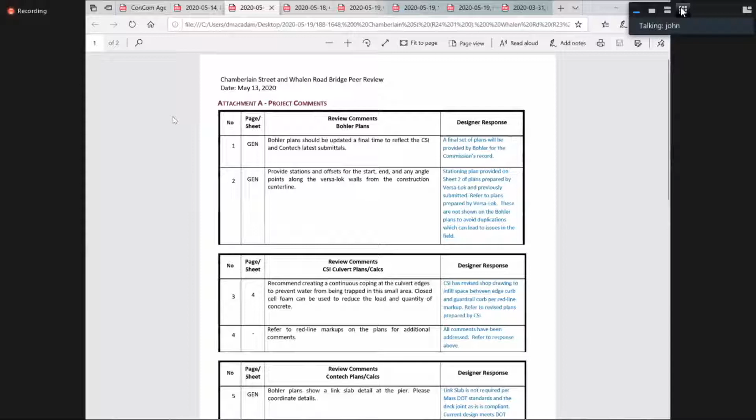Mr. Chairman, if I could make a request, if the board would entertain. Essentially if we're all set with the Lucas comments, and it was just some housekeeping items from the Beta standpoint, I think on our end we feel totally comfortable we're able to get them whatever they might come up with. So on our end there's really no issue with getting them what would be needed. Would the commission entertain offering an approval contingent upon addressing all of their comments, just to avoid a hearing and hopefully move forward? Yeah, I think I'm okay with that.

Carrie, Melissa, how do you feel about it? This is Melissa, I'm fine with that. Carrie? Yeah, sure, okay, I think that makes sense. I agree, the issues outstanding with Beta are minor, and they've messaged to us that it looks good. They just had a couple things to tie out.

Having said that, if I can get a motion to close and approve the amended notice of intent for RKE Hopkinton, 0 Chamberlain, 0 Whalen. This is Melissa, I'll make the motion. And a second please. Second, Janine. Okay, and we'll do the roll call. Melissa? Aye. Carrie? Aye. Ed? Aye. Janine? Aye. And it's an aye for Jeff. So the motion passes, thank you.

Mr. Chairman, this is Scott. Could I ask a quick question as a follow-up now that the amendment is issued? Do you believe, Matt, similar to Matt and Don, that an additional pre-construction meeting or additional meeting on site would be helpful or even needed under the order to further proceed with the work? The order calls for a pre-construction meeting. We've had a number of meetings, but I'm not quite sure any of those have fully satisfied the pre-construction meeting. Matt and Don, would it be helpful for us to schedule that?